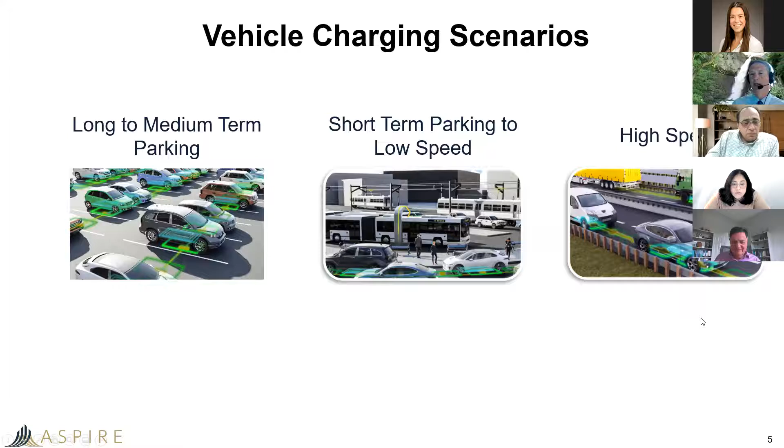So the whole point being, one of the problems with electric vehicles is range anxiety. If you have an electric car, you're probably limited to somewhere around 250 to 300 miles before you have to charge that battery, and when you do go to charge it, it takes a while. So this is a method we are trying to work on here to try and avoid the range anxiety, so that you can keep your battery charged as you move around.

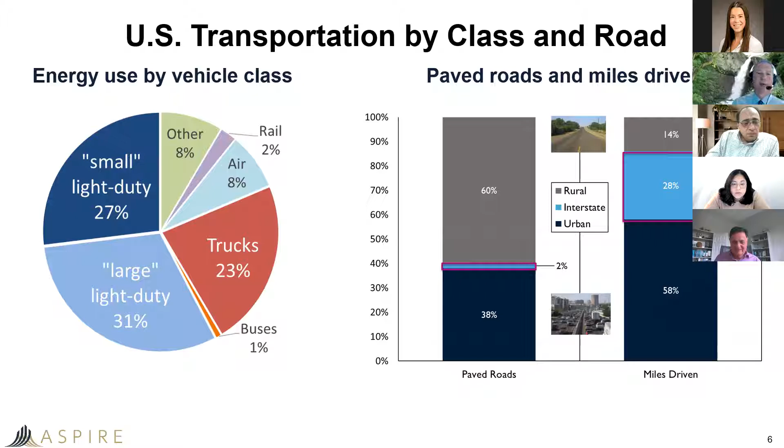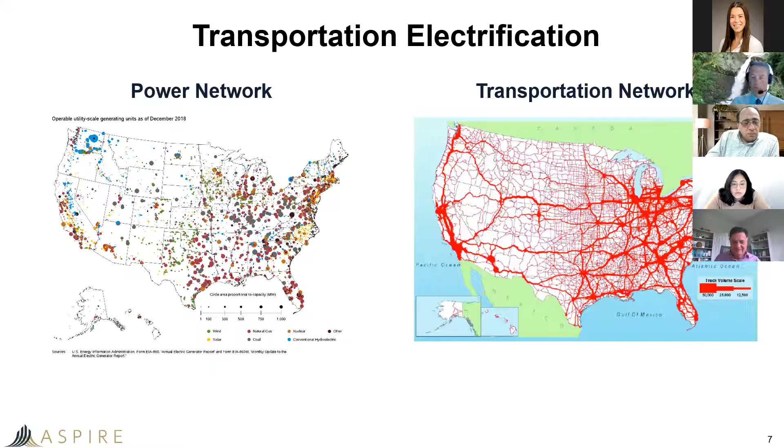One of the problems when you try to electrify heavy trucks is that if you have to have all the batteries needed to run that, it really decreases the usable weight that can be used to move the freight, because the batteries become so heavy on the truck. So part of the vision of Aspire is that because these trucks can charge their batteries as they move along the roadway, they wouldn't need as many batteries, which would cut down on the weight of the batteries as well.

Of course, the vision is to try and integrate either wind or solar energy, renewable type energy, into this whole scenario. So this kind of paints you a vision for the future of how this would all work and how it would all tie together.

Now, as you look at that, you're probably thinking this is a huge, massive undertaking. And you're right, it is, because not only do we have to worry about things like how we get these charging systems into the pavement so they don't damage our pavements and affect durability, but you have to work your way all the way up to the grid itself. How is the grid supposed to do this? If you know anything about the electrical grid in the U.S., you know it's fairly old, has had some problems and continues to have problems, and really needs work done to it. So we're really going through everything from the electrical grid all the way down to embedding these systems in pavements.

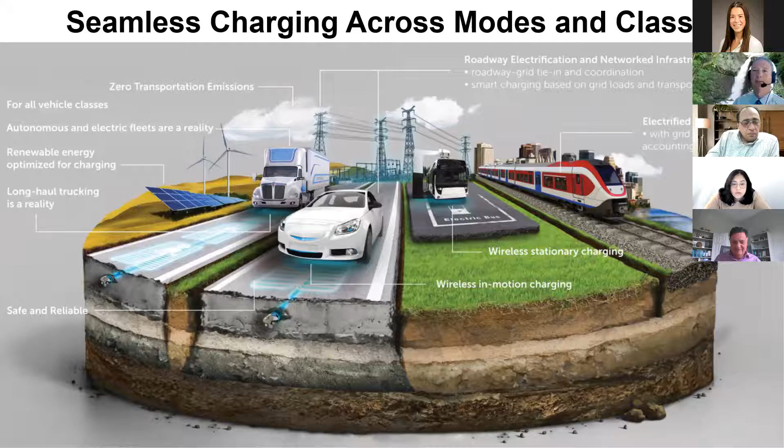So we're really at that point where there's this huge opportunity, because the energy grid needs to be rebuilt, because the road system needs to be basically rebuilt, much of it. We're kind of at a point in the US where we could really begin to integrate new systems into our transportation systems, so that we end up with something that not only functions well, but it's sustainable and it's equitable for everyone.

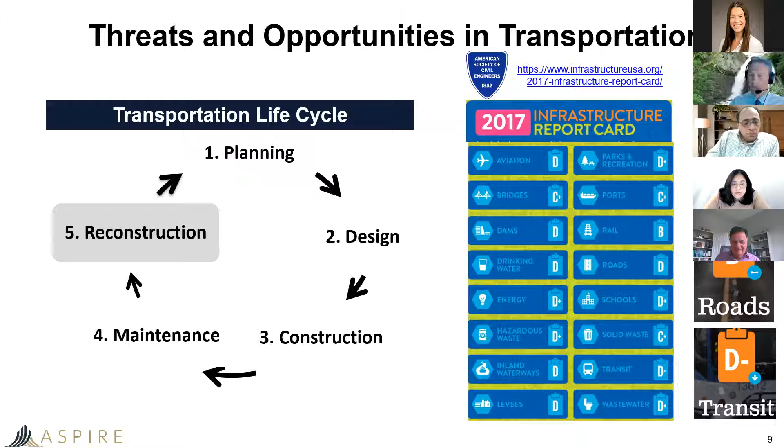And so the Aspire Center is really here to try and determine how this can all be done. It's a huge undertaking. We have a lot of different people from a lot of different places working to do this. I'll just give you an idea here of the different areas that we're working in. There's power research as part of the Aspire Center going on. This group of people, they are the electrical engineers of the bunch, and they are working on trying to figure out how you get the power that you need where it needs to be, and how you actually power these systems up.

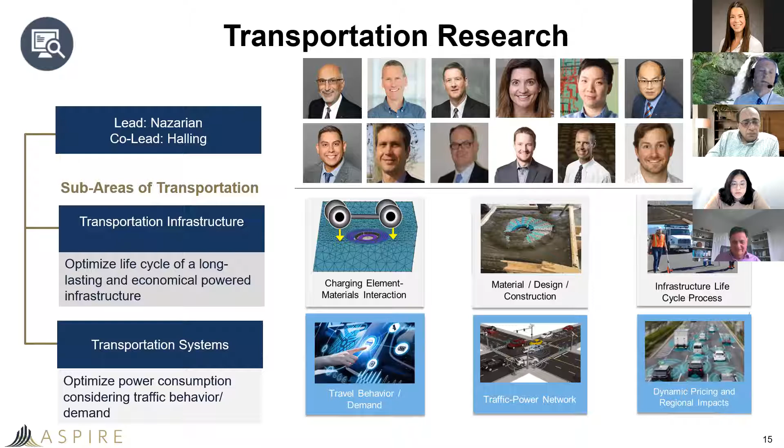And then the soft transportation, what you see here is transportation systems. They're worried about travel demand. How's all this going to work when people start traveling up and down the road and those sorts of things. So what we're trying to do is an extremely large optimization problem. You can see here we just have a couple of mock-ups of the charging systems themselves. So basically what happens, you can see it over here. And for those of you who may know more about electrical engineering than I do, please excuse me.

But basically the way this works is that there's a roadside where the power comes in, and then as your car moves over, it's wirelessly transferred over to the vehicle side. And that typically, or at least we perceive that being done, basically using a magnetic field. So what happens is you drive over the embedded system in the pavement, it creates a magnetic field. That magnetic field is shaped so that it pushes the field up towards the vehicle. And then there's a receiver on the car. And that's how the electricity is actually transferred from the system in the road to the car through a magnetic field. So it's not like you have something dragging on the pavement to try and pick that electricity up.

And so trying to optimize this is a huge problem. And one of those things is how do we integrate all these components into the system? And in my case, how do we get those into a pavement? And how do we get them to hold up under the traffic and the environment that they're going to see? And conversely, how do we get the pavement not to lose durability because these systems exist in it?

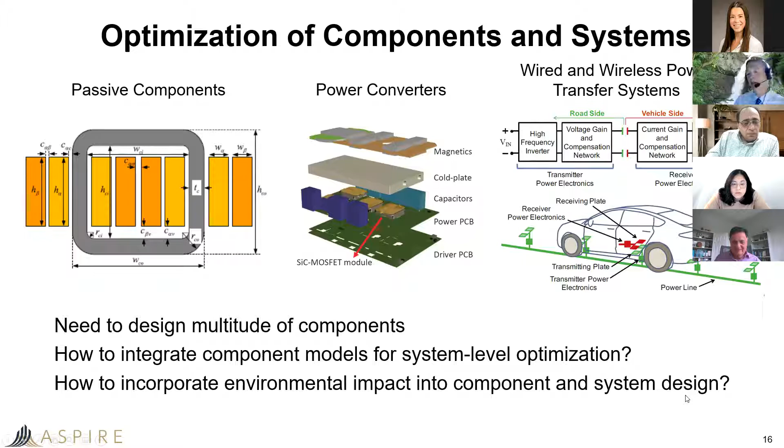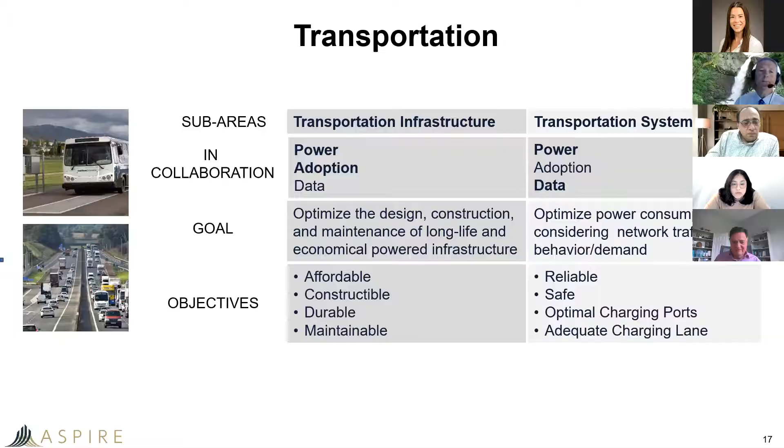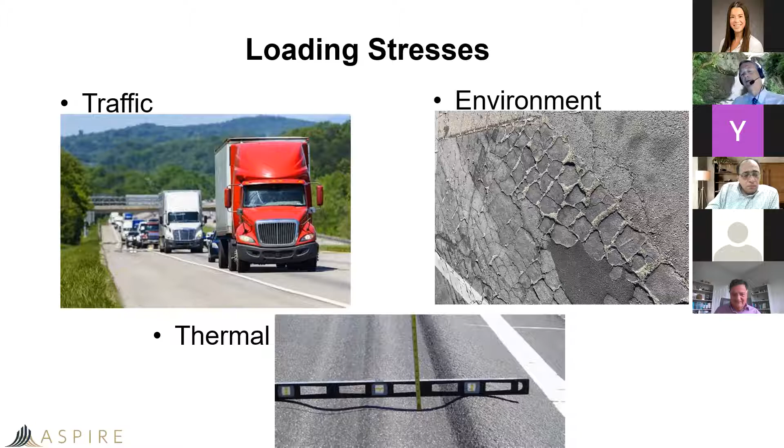Pavement design: are there any challenges that are going to come about from a pavement design standpoint? There are a lot of different ways that we can design pavements, different methods. But many of the states in the United States now are using Pavement ME, which is the mechanistic empirical pavement design method. Are these systems going to cause us to have to change how we design the pavements? That is a question that has not been addressed or answered at this point.

And then there are materials challenges. As I mentioned earlier, if you have either an asphalt or a concrete pavement, how is the heat that's generated from these systems going to affect those pavements? Is it going to do some damage to them? Is it going to shorten the durability of a pavement because we've now put these systems in it?

If you're looking again at rigid pavements, we're putting dowel bars in it. If we're putting reinforcing steel in rigid pavements, now we actually have included in the pavement these systems that electricity is being run into. How's that going to affect dowel bars, for example, or reinforcing steel in pavements that have reinforcing steel in them? Those are questions you have to ask as well. Obviously, we don't want to have a case where we are doing anything to decrease the durability.

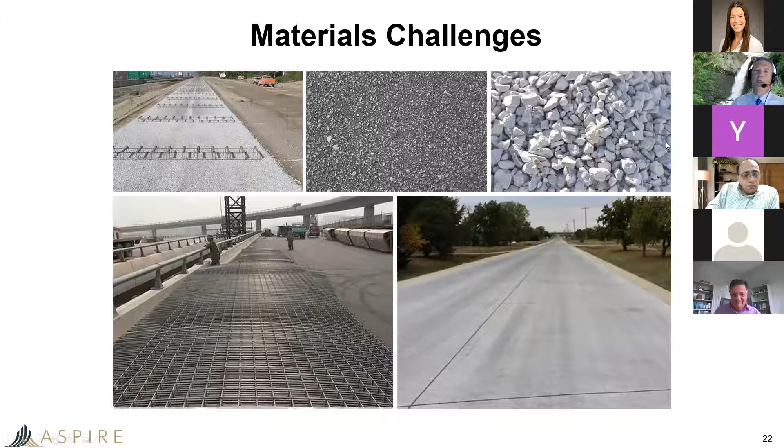How are these systems going to affect long-term, for example, the durability of the binder grade that we put in an asphalt, or how are they going to affect the cement that we put into a concrete pavement? So these are questions that we are now looking into, and we'll continue to look into in the future of the center.

For your passenger car, it doesn't take all that much power. But in order to do this with heavy trucks, you're talking about something in the neighborhood of 200 kilowatts. So it's a real high power level that has to be done in order to get it to work. And so these types of installations have been made on very short pilot type projects.

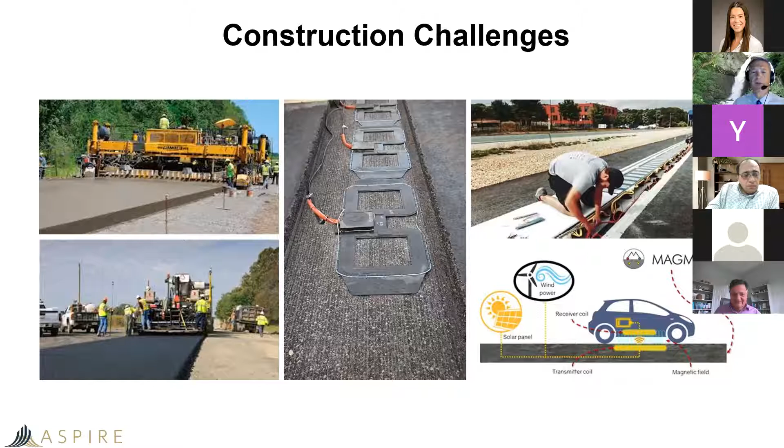One of the things in doing dynamic wireless power transfer is that you have to try and keep the gap closed between the system that's in the pavement and the receiver that's on the bottom of the vehicle. The closer those two are together, the easier it is to transfer that power. And so the electrical engineers tell us that they would like to try and keep these systems within about 2 inches of the surface of the pavement.

And that way you could put the receiver on the bottom of a vehicle, and they would like to try and maintain something on the order of around a 10-inch gap. And so if we're going to bury these so that they're only 2 inches down, that's going to affect some of the maintenance things that we do. It's pretty common to go out on a flexible pavement and mill maybe 1 inch to 1.5 inches of the surface and replace it. But you've got to make sure you never get down into those electric systems when you do that. And so maintenance becomes a problem.

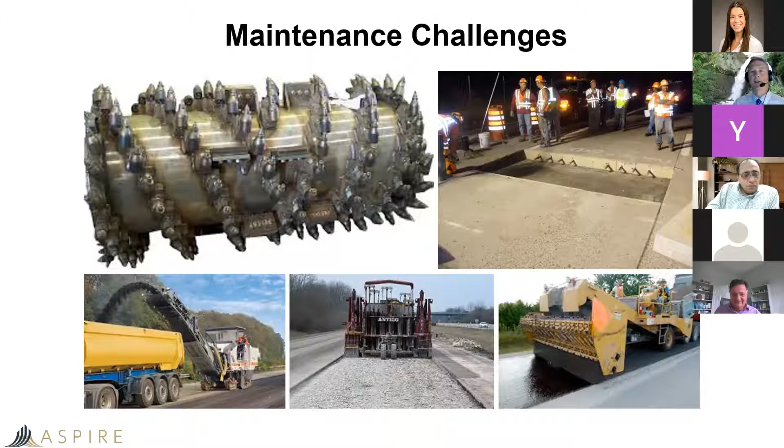Also, if you have to do some concrete maintenance, what's that going to look like with these systems as well? These are all unknowns that we're not sure about, but are things that we're working on and trying to define as part of the center and the work that the center is doing.

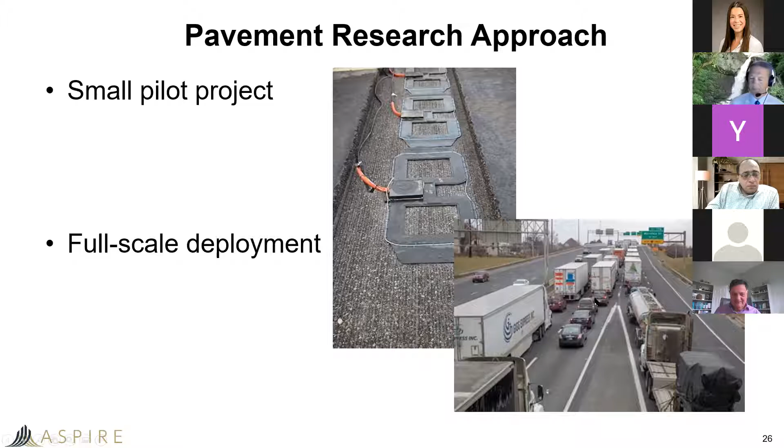So having said that, I know it was a really quick overview of the center itself and some of the concerns that we have from a pavement standpoint, but I'll stop there and try and answer any questions anybody may have. I'm sure that you have questions about things that I did not address in the talk. So any questions?

Thank you so much, Professor. It's a very great talk. There's a lot of topics that's covered, and it's very interesting to know how this pavement for electric charging is going to look like in the future.

I think we have several questions in the chat box. From Amir Malakuti: does the wireless power transfer system create noise for communication devices, for example, phones?

That's a good question. The idea is that it shouldn't, because the wireless power transfer is magnetically shaped so that it only goes into that receiver on the underside of the car. I think the question has to do with whether, if you're driving down the road, you're not going to get cell phone reception, or it'll do something odd to your phone as you drive over it. The answer is no, it shouldn't, if it's done correctly. At least that's my understanding from electrical engineers.